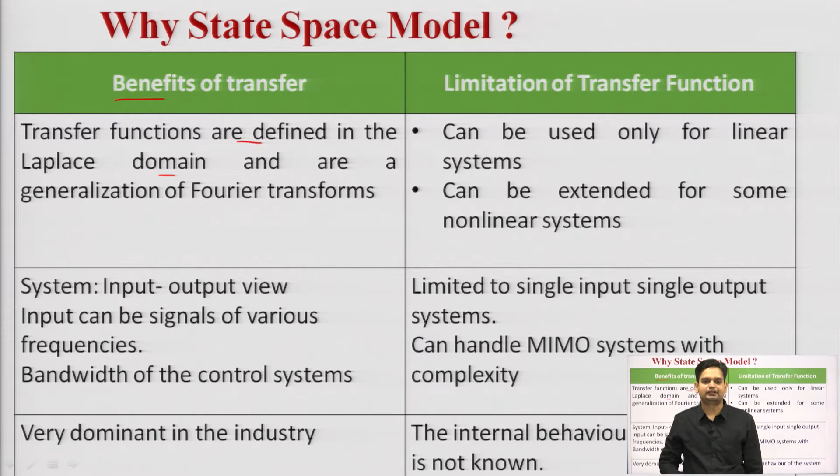Now let's see the benefits. The transfer function is defined in the Laplace domain. It means whenever we have to study the system in the frequency domain, we refer to the Laplace transform method, that is, the transfer function method.

In the transfer function, we observe our output in the S domain and our input in the S domain, and their ratio is the transfer function. So in the transfer function case, we are not initializing the state. It means the initial value of the system is 0 in case of transfer function.

This is the assumption we have to use in the transfer function. So if I am dealing with any control system having a certain initial state, just like an electrical network with certain capacitance and inductance storing certain energy, those initial values will not be considered in the transfer function.

In terms of the system, we can see the input and output view in terms of frequency, and we can estimate the bandwidth from the transfer function model. It is very dominant in the industry.

As I told you, this transfer function is only valid for linear systems. Whenever our control system behaves in a non-linear way, the transfer function will not give us the correct model, so we have to look for an alternate approach. The transfer function can be extended to non-linear systems, but in exceptional cases we have to apply a lot of complex modeling in terms of equations to model non-linear systems using transfer function.

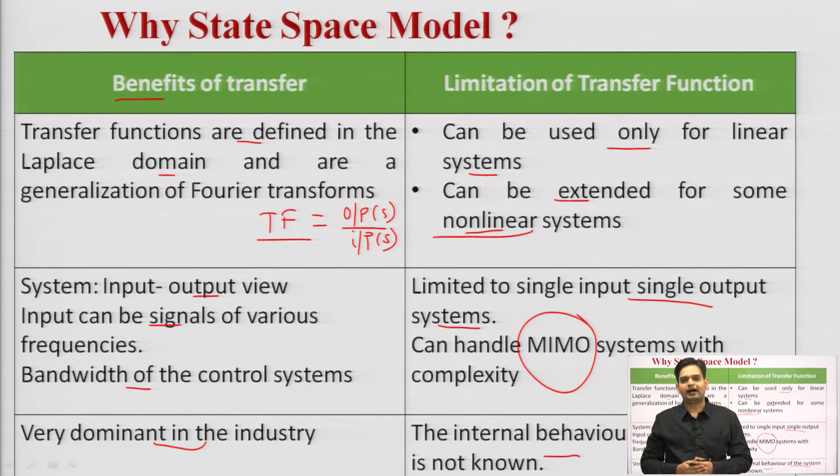That is why we need a solution which can explore all these problems and give us a finite model. That is why we are going for the state space model.

Generally, I am taking an example of this model. I am considering this model as a chemical process plant, which can be used in petrochemical and oil industries. Suppose this is a chamber where we have to maintain a certain volume of steam, maintain a certain temperature of the steam, and maintain a certain pressure over the steam inside this boiler.

We also have to define certain subsystems. We need to add systems which will monitor the pressure, monitor the temperature, and monitor the volume of the steam that we are providing in this boiler.

All this sensor or system we need to define in this system. Whatever changes, suppose my volume of steam is varying with respect to time, this volume is changing with respect to the state of other chemicals or material. We can observe that these factors affect my output, how they are varying with time - all this analysis we can observe in the state space model.

Basically the variable which is affecting my output, and this variable changes by providing the input, they are known as the state variable.

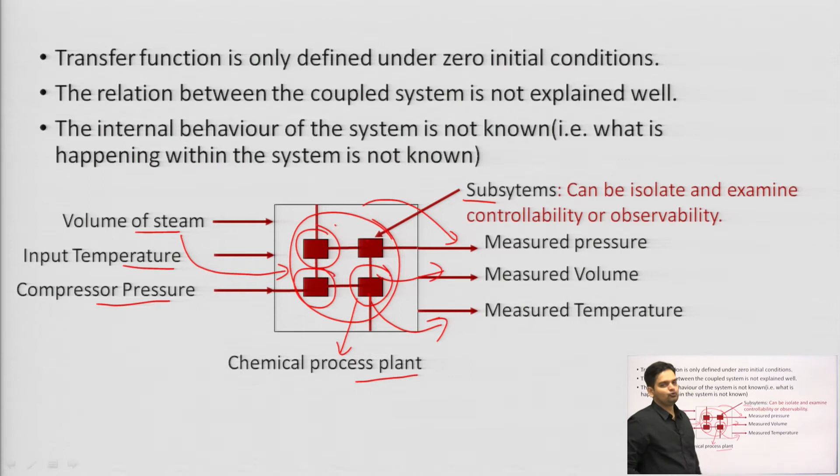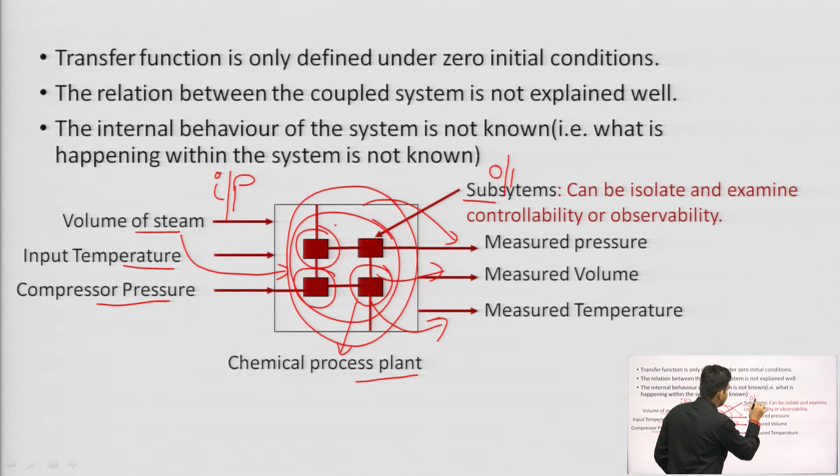Whenever I am modeling using the transfer function, I do not know what is present inside the box. I have to consider only the input quantity and observe what is coming at the output - what is running inside the system I do not know. This is the statement of the transfer function model. Whenever I have to look inside the system, we have to go for the state space model.

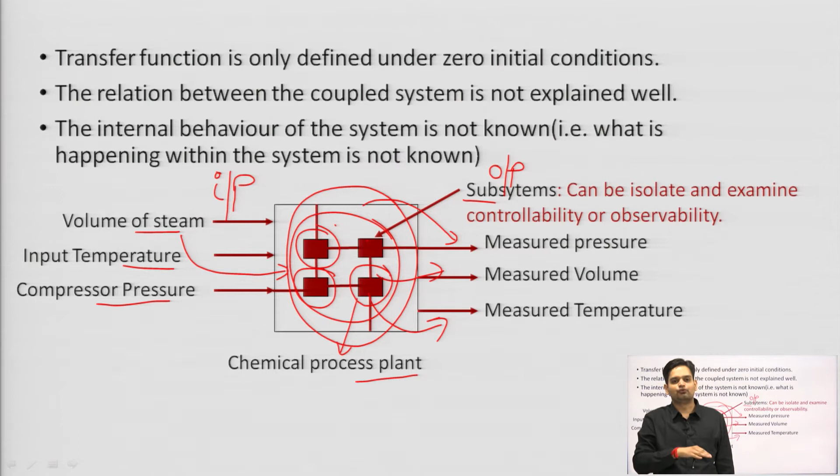Now we will see the state space model. The state space model basically consists of three elements: one is the input, output, and the internal variable of the system - this internal variable of the system is called states.

State space method came into existence in the era of 1960. The state space model is generally considered in modern control theory. If we talk about control theory before 1960, in that case we used to deal with the transfer function - our frequency domain analysis, which includes Bode plot, Nyquist plot, and polar plot analysis. All these analyses are still very famous today.

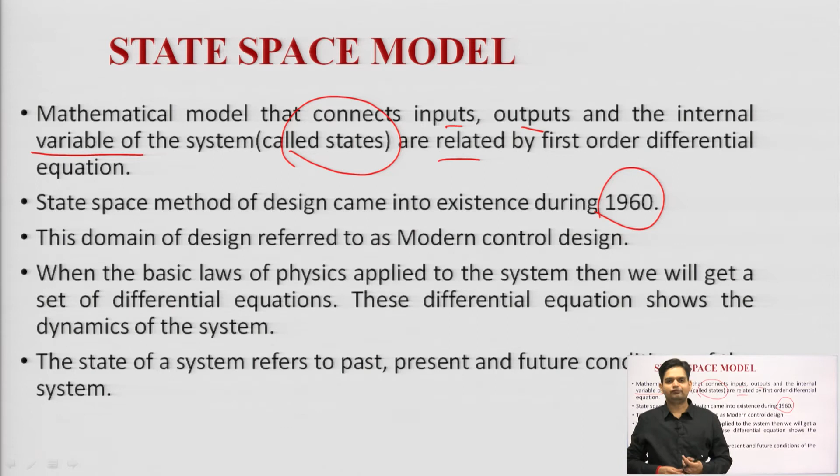They are used, designed, or implemented with the help of transfer function only. So after 1960, whatever modeling we are doing in industries is with the help of state space model. This is the basic introduction, and with the help of state space model we can predict the present state, past state, and future state of the system, which is not possible with the transfer function.

In the state space model, it is the representation of dynamics as I told you. These dynamics are the state variables of the system in terms of n set of differential equations. The dynamics governed by the system will be explained by the differential equation used to model the control system. It converts the nth order differential equation which governs the dynamics into n first order differential equations.

It means in the linear way we can analyze our system using the state space model. It will simplify the complex differential equation into linear differential equations, and the number of states is basically given by the order of the differential equation.

Suppose the differential equation's maximum order is d2y over dt square plus dy by dt equal to 2y plus 3 - here the highest order is 2, so I will say 2 state variables we have to define in our model. Our order of differential equation gives us the number of state variables that we are going to use in our system.

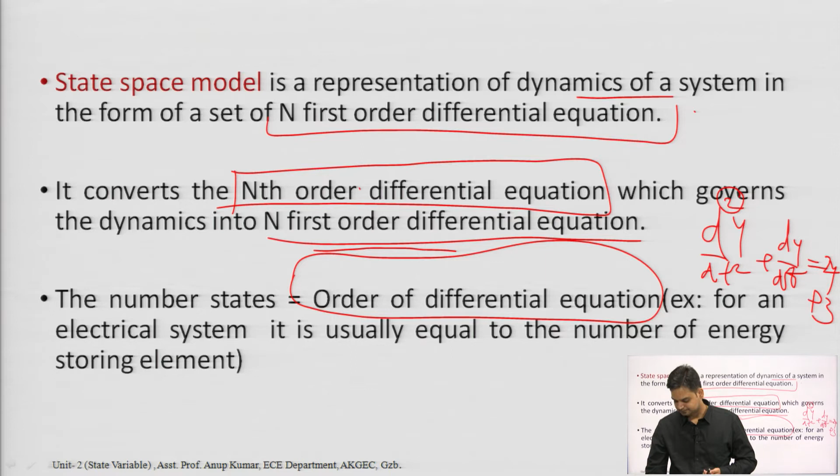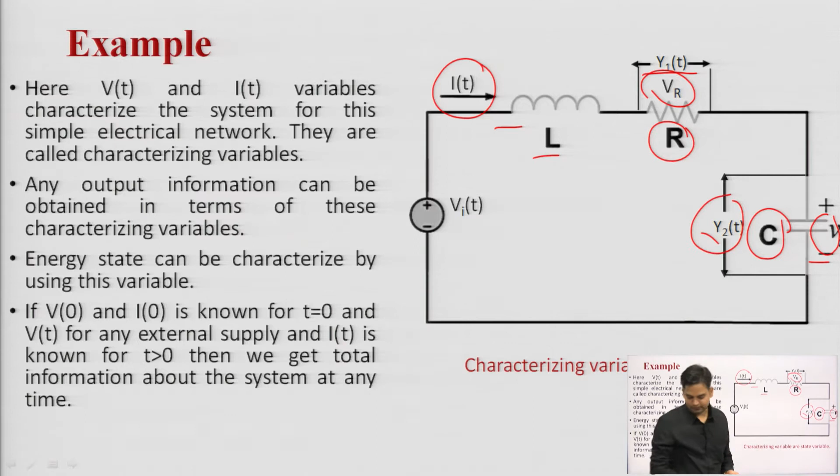So I am saying y1(t) is the first output, y2(t) is the second output. Now, applying KVL gives one equation: Vi(t) equal to L di/dt plus R i(t) plus Vc, this is the second equation.

These two equations show the KVL of the previous circuit diagram. If we separate the differential variable, dVc/dt, into the LHS and the remaining terms into the RHS, we get this expression. So here dVc/dt is given by this term. Now using this equation, I separate out di/dt and get this expression. So the differential term comes in the LHS and the remaining variable comes in the RHS.

So I told you the state variables come from the inductor and capacitor in terms of current and voltage. So Vc, voltage, is my first state variable, and I(t), current, is my second state variable.

Now if I want to represent this equation in matrix form, this is the differential matrix: dVc/dt, di/dt, and this coefficient will come. When I write this equation, the Vc term is absent, so I write 0 times Vc. So one coefficient is Vc, second is It; Vc's coefficient is 0, so I write 0 first, then It's coefficient is 1/C, so I put 1/C. This is the conversion of equation 1 into the first row of the matrix.

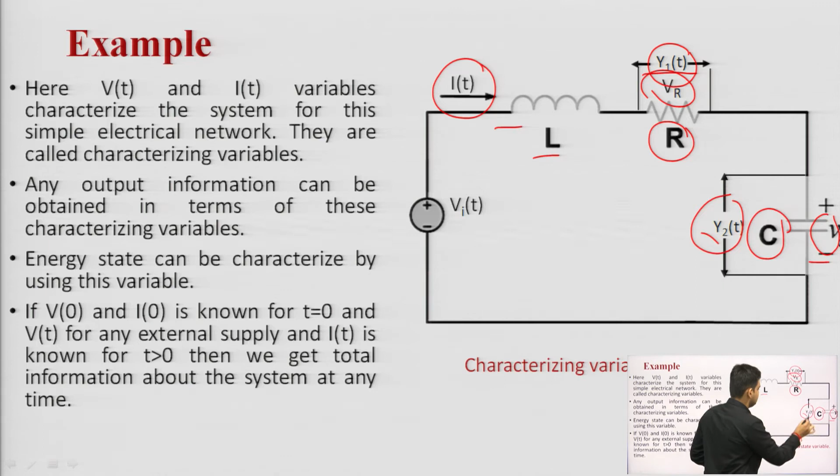Now, in the same way, we would like to observe the output. As shown in the previous slide, we observe output across R as y1(t), and output across C as y2(t). So I will write the equations for these.

For the output equations, y1(t) equal to Vc, and y2(t) equal to Vr. Vc is given as x1, as we assumed earlier, and input is not present, so it's 0 times u. y2(t) is Vr, equal to I times R, where It is the state variable assumed as x2. So it's R times x2 plus 0 times u, since input is not present in this equation.

Now I have to model this in matrix form: y1, y2 on one side, and state variables x1, x2 on the other. In equation 1, only x1 is present and x2 is absent, so I write 0 times x2. The coefficient of x1 is 1, so I write 1, and the coefficient of x2 is 0, so I write 0.

In the same way, for the second equation I get R times x2, so I write plus 0 times x1, since x1 is absent here. So the coefficient for x1 is 0 and for x2 is R. This is my output state equation.

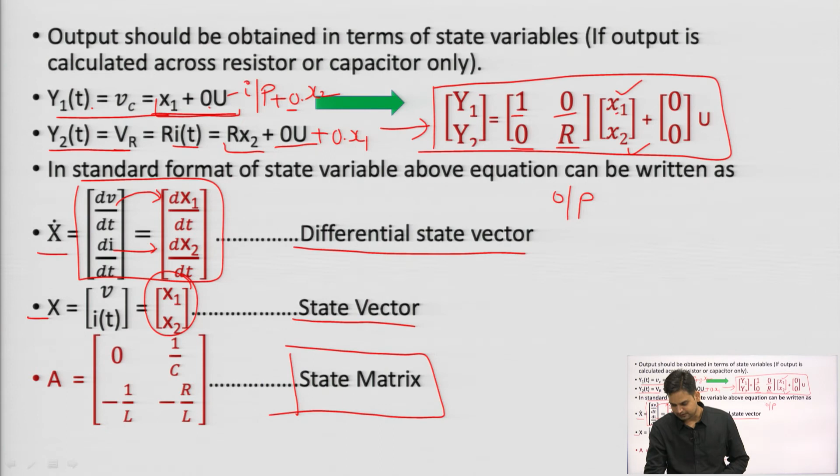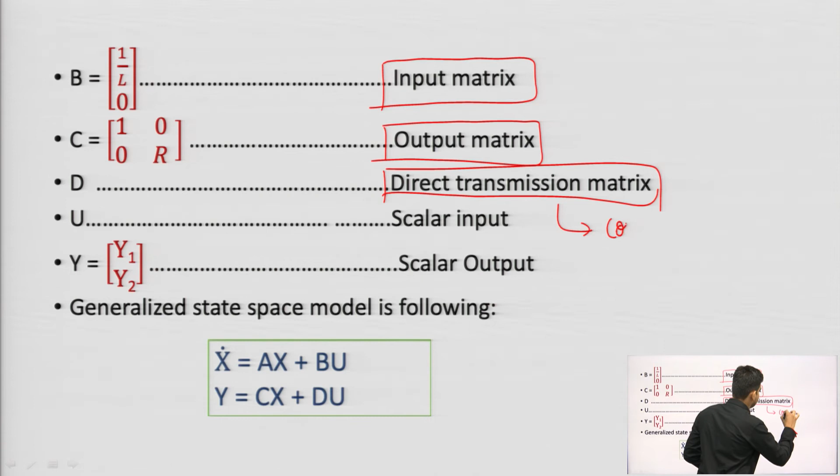So here I am making this matrix the A state matrix, this matrix corresponding to the input I am calling the B input matrix, and whenever I am observing my output, this matrix is regarding the output variable. So this is the C matrix which is explaining the output variable, and this term is coming B for input, C for output, and D is here the direct transmission matrix. In some textbooks we are saying it is the coupling matrix also. What it means we will see later.

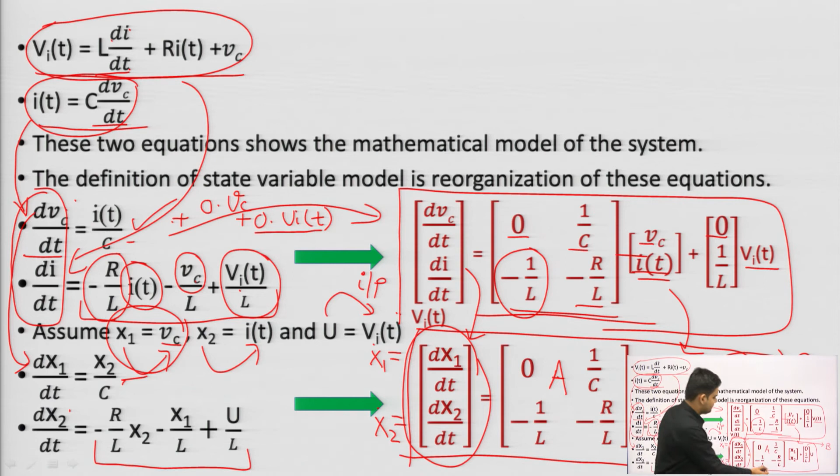If we see, u is the scalar input, y is the scalar output, and the generalized equation would be x dot equal A x plus B u, y equal to C x plus D u, if you observe the previous matrix. So this matrix is x dot, this matrix is A, this matrix is x, and this matrix is B, this matrix is u: A x plus B u. And this matrix is written as y equal to, this is C, this is x, this is D, and this is u. So D matrix is 0 here. I'll tell you later about this D matrix.

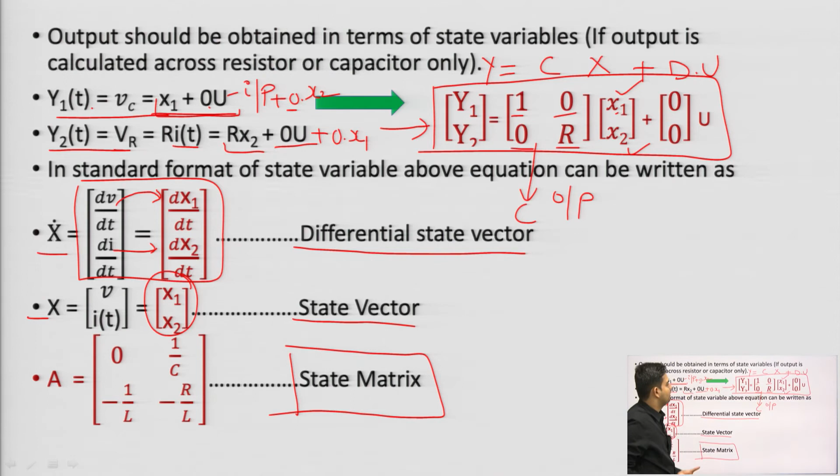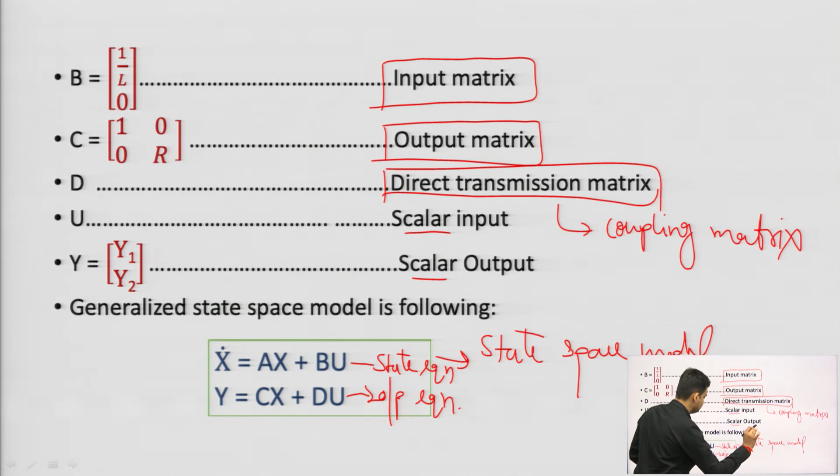So this is the basic equation that we are using to represent the state space model. This is my state space model in these two equations: this is known as the state equation, and the bottom one known as the output equation, which will help us do the analysis of control systems.

The basic terminology that we are using here, one is state. It refers to the smallest set of variables whose knowledge at t equal to t naught, together with knowledge of input at t greater than or equal to t naught, gives the complete knowledge of the behavior of the system at any time t greater than t naught. So here we need to select the minimum set of variables.

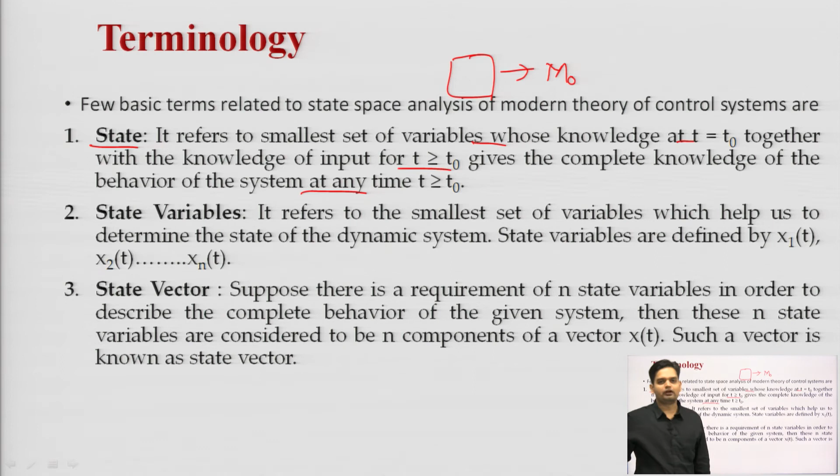For example, whenever I am designing my space system, I want to launch the satellite. Initially I measure the mass of the satellite, it is m0 on the earth station. Now on the rocket I launch it, it goes to a distance of 10 kilometers, it will consume certain fuel, mass will change to m1 because mass is decreasing as my fuel is getting consumed. So that is why my next mass is m1, and after a distance of 1000 kilometers, the mass of the satellite would be m2.

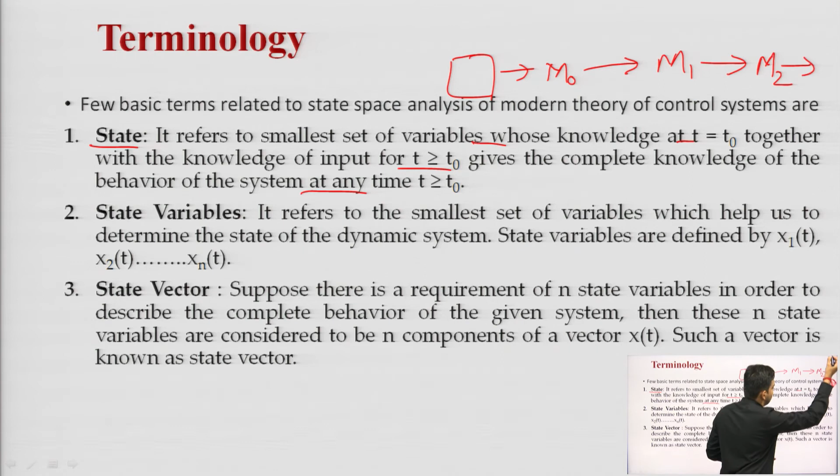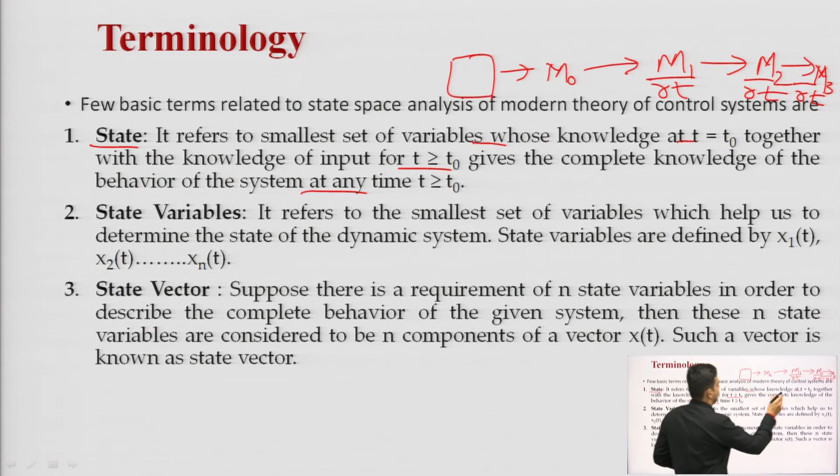At a certain stage the satellite stages will separate out, and I will get a reduced mass of the system, that is m2, and finally when I reach the orbit, I will get a very small satellite with a very small mass of m3. So what is happening here? My mass m1 changes with time, mass m2 changes with time, mass m3 changes with time. This is a time varying system. So what is happening, I must know the state at t equal to t naught, that is the state of the mass of the satellite at the earth station, and when it reaches orbit for t greater than t naught, how my mass is varying.

This behavior can be explained by the state of the system. This process can't be explained by a transfer function. That is why we are not using the transfer function model to model a time varying system.

Now, state variables are the smallest set of variables, meaning the variables which define the output, and if you apply any input, they will change and reflect in the output. So we only need to consider those state variables.

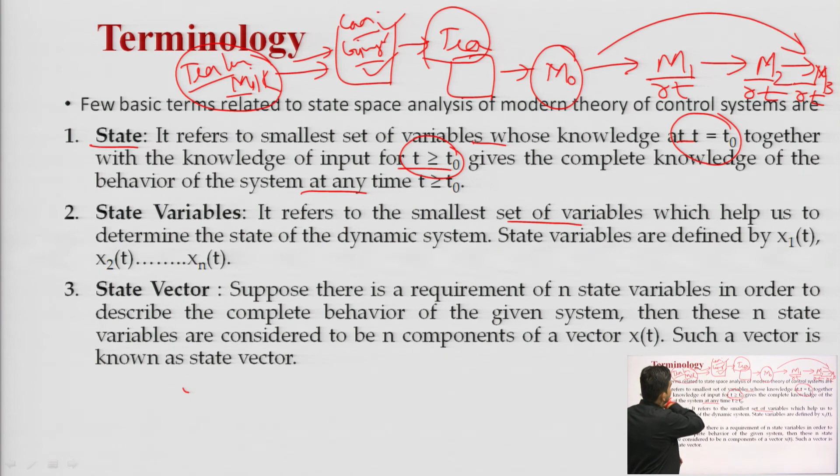For example, if I have to make tea, what is my input? Input is milk and tea leaves. We are providing input, and what is the output? Output is my tea. In between, I am using cardamom and ginger for flavor. So these are all also variables to obtain the tea, but my important variables are milk and tea leaves. I can avoid the cardamom and ginger according to my flavor, they are optional. These two variables are the minimum set of variables which can obtain tea at the output.

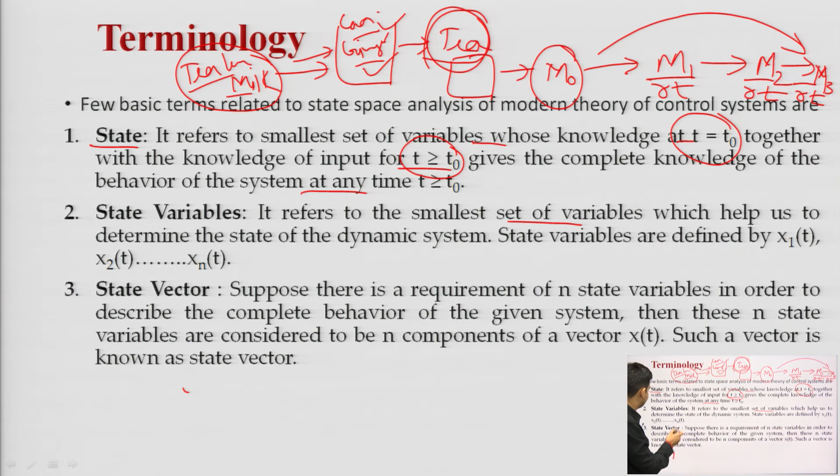So for state variables, we have to select only the important and minimum set of variables which will explain the system. This is the requirement of a state variable, and if we combine those state variables, it becomes a state vector. Now we will see the state space equation.

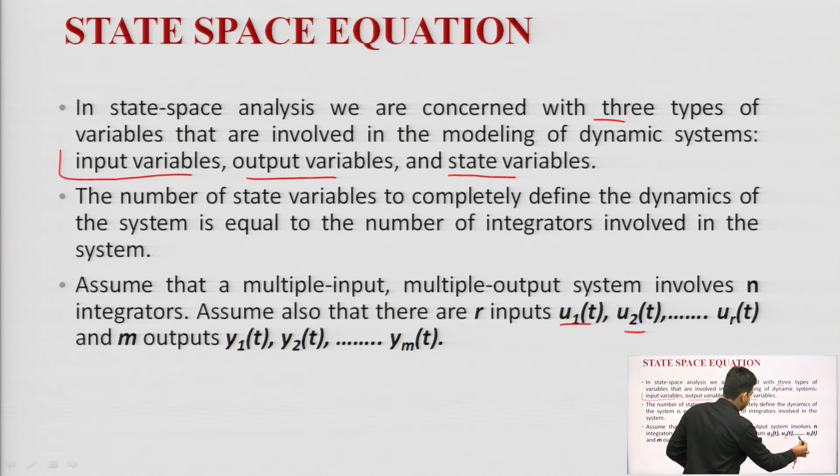We are concerned here with three types of variables involved in modeling a dynamic system: input, output, and state. If we have r number of inputs, we write u1, u2, up to ur. If we have m number of outputs, we write y1, y2, y3.

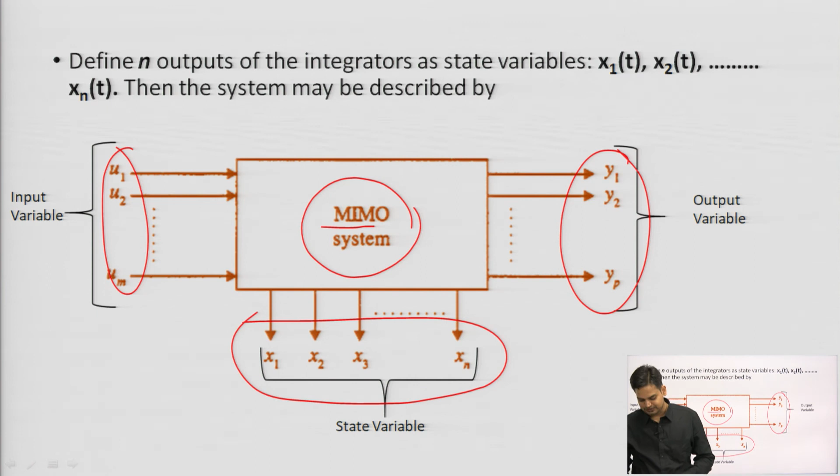This is the generalized representation of the state space model of a MIMO system, having m number of inputs and p number of outputs. In between, governing or controlling this conversion is the state variable, which decides this number of outputs. This is the generalized modeling of a state space model.

If I have one state variable, the order is 1 cross 1. If I have two state variables, the order is 2 cross 1. If I have 3 state variables, the order is 3 cross 1. So n is the number of state variables I am using, and that will decide the size of this matrix.

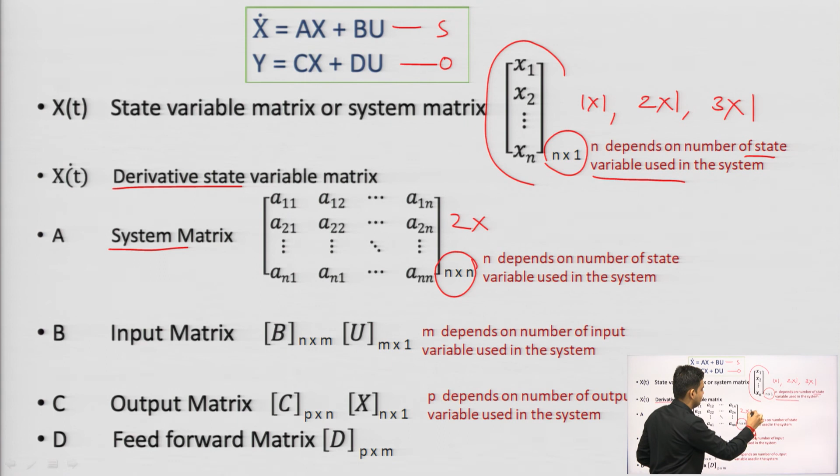X dot is the derivative of the state variable matrix. A is the system matrix, given by order n cross n. Again, same concept: 2 state variables, 2 cross 2; 3 variables, 3 cross 3. So the system matrix shows us how the various state variables are connected to each other inside the system.

The input matrix tells you how the input vectors or input variables affect or change the state variable. The output matrix tells you how changes in the state variable reflect on the output state. And feed forward: whenever I have to bypass the system, or skip processing the input, I go for the D matrix, which is the feed forward matrix.

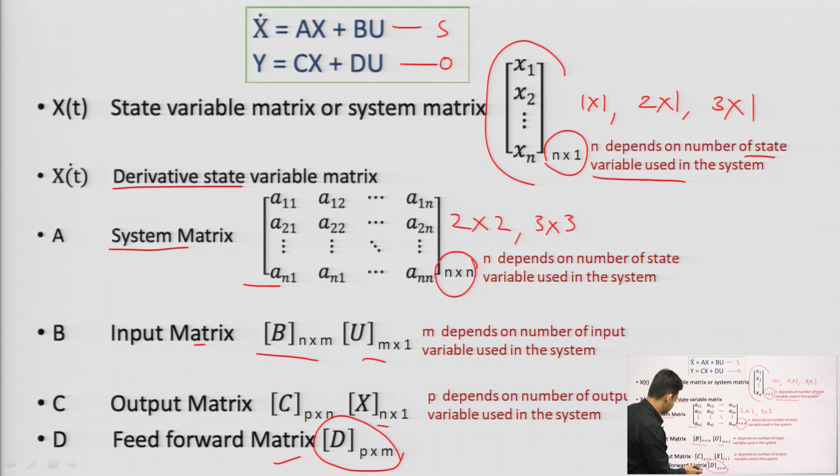In this matrix, n is the number of state variables which decides the order of this matrix, m is the number of input variables, and p is the number of output variables. This is the generalized equation that we will discuss further in the next session.